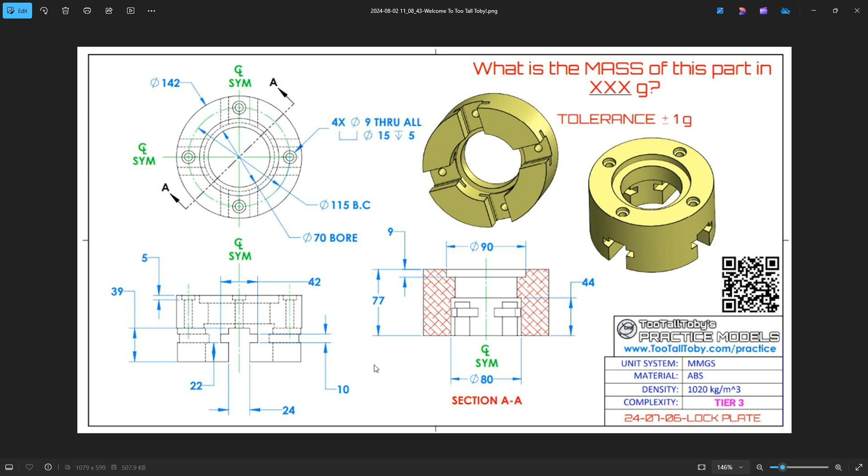So we're going to use IronCAD to build this, and this is all drag and drop models in IronCAD. We don't have to go into any sketch models for this. So let's go ahead and hop over to IronCAD and show you how you can do this.

First thing we're going to do is start with our cylinder. We're going to drag and drop that out, and we are in millimeter units. So we're going to set the value here for our outer diameter, in this case 142. And we know the depth of this is 77, so we'll go ahead and set that as our starting point.

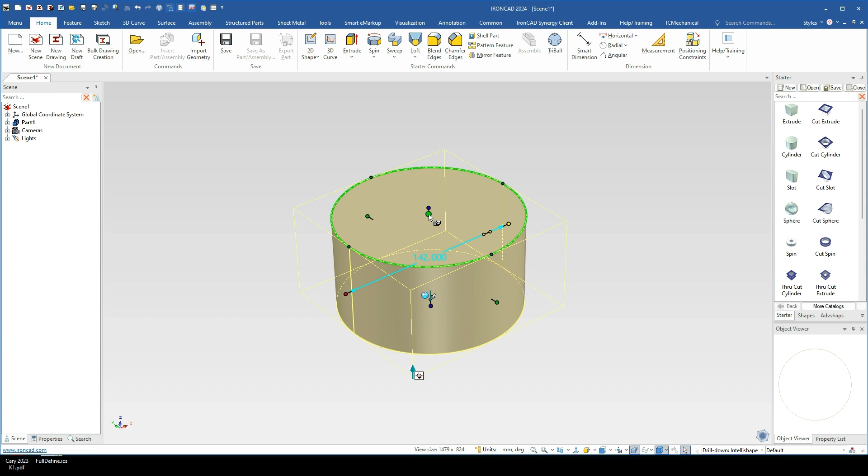Next, I'm going to build it from the bottom up because we're going to put the cutouts on this side, and then we'll put our counterbores on the other. So we'll use this as our starting location, drag and drop another cylinder precisely to the center, and set that diameter for this one, which is going to be 80. It has a depth of 44, so we just hit enter until we get to our depth handle - in this case, 44.

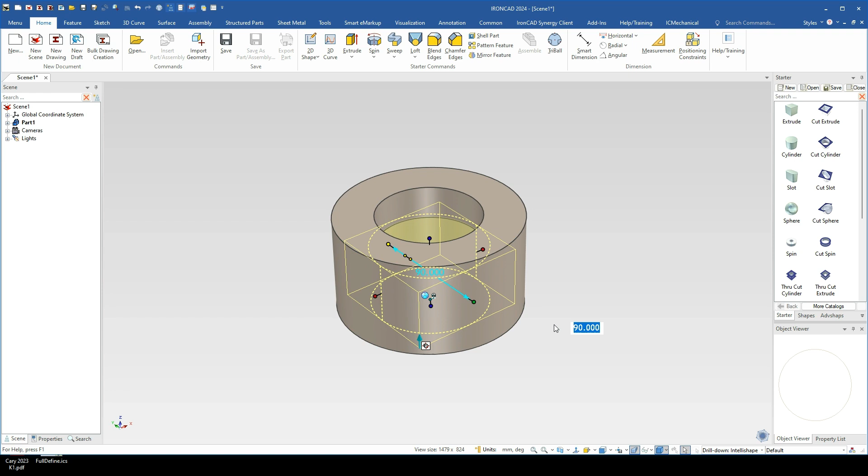Next, we're going to drop another cut cylinder to do the one on the bottom. I'm going to drop it on this edge and hold the shift key down - it'll automatically put us in the center. Again, I just need to set the diameter and the height. If you hit the enter key, you'll see the yellow handle change until you get to the extrusion height, which we're going to set to a value of 9. So that's our bottom one.

Then we'll do the last one the same way. We drag and drop, find that center point or drop on the edge, and it'll snap to the center. We know the diameter on that one is 70 for the bore there. So that's all we have to do to get those three placed, as you can see as we rotate around - very, very easy to start with that process.

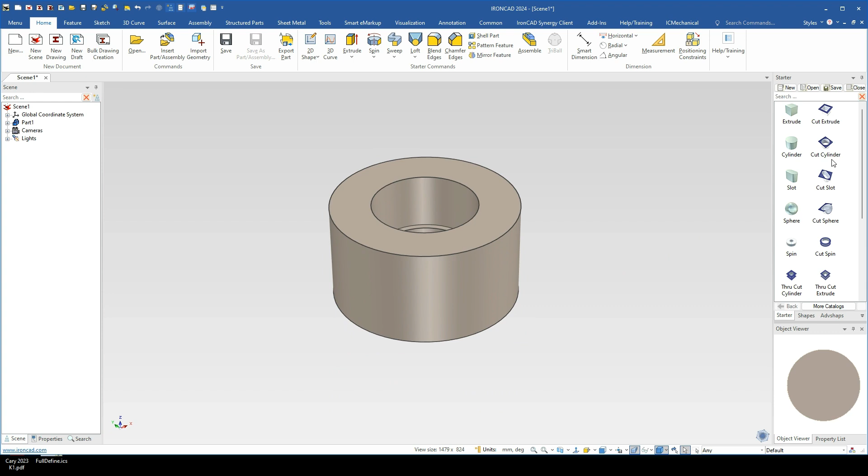Same thing for the extrude. We're going to drag and drop right into the center here because we know the width of this thing. This is the inner one, so we're going to set the width of that one to 24. Then we right click - I did right click on that before I set the value, by the way, so it does it symmetrically. As you can see here, as I drag, it does symmetrically do it, so when you release, it's going to use a symmetrical value.

So anyways, we don't need to set anything here for this one. We're just going to pull it through, and then we'll set the depth on this, which we have an overall depth of 39 for. So that gives us our main shape here.

We can drag and drop another one out here and do the same thing, or we can reuse this shape. In this case, I'll just turn the tri-ball on, and you can simply right click and drag, say copy here, and set the distance as 0, then hit OK, and that puts us another shape right in there. You can see it's kind of floating here in space because we can use this to build our width cutout here.

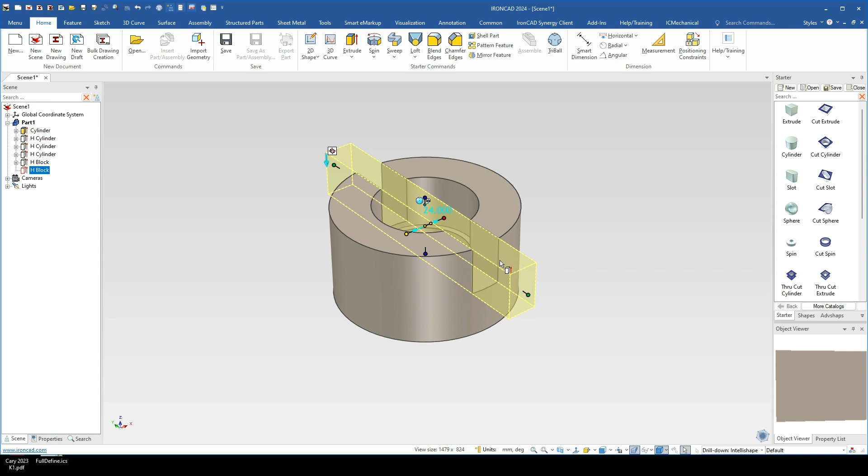What we know is that top part of that cut is 22 from the top. So we'll take that overall value right now and subtract 22 from that, which puts us at the top value. We know the width of that cut, the thickness of that cut, is 10. And we know the width—again, we'll right click and pull this, you'll see that cut appear. The width of that is 42 in this case. So that's all it takes to build that particular shape here.

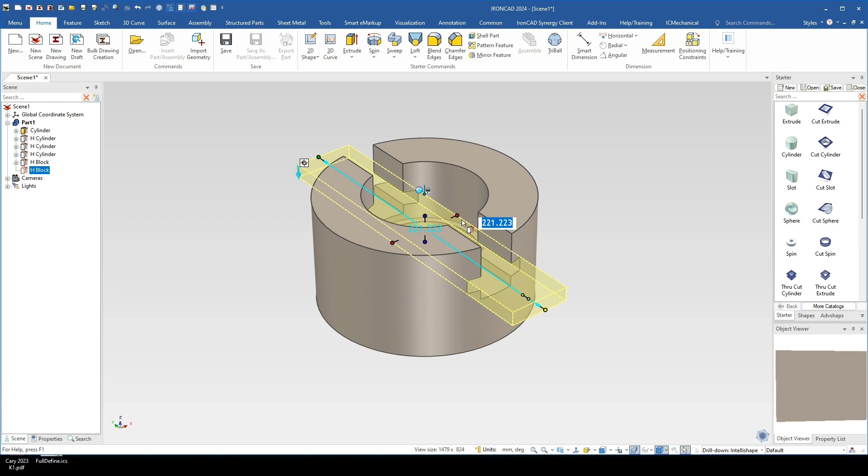So we don't have to do a sketch plane, draw this profile, extrude it in both directions. You can certainly do that if you like, but this is just another way to do it. And you can use both features independently.

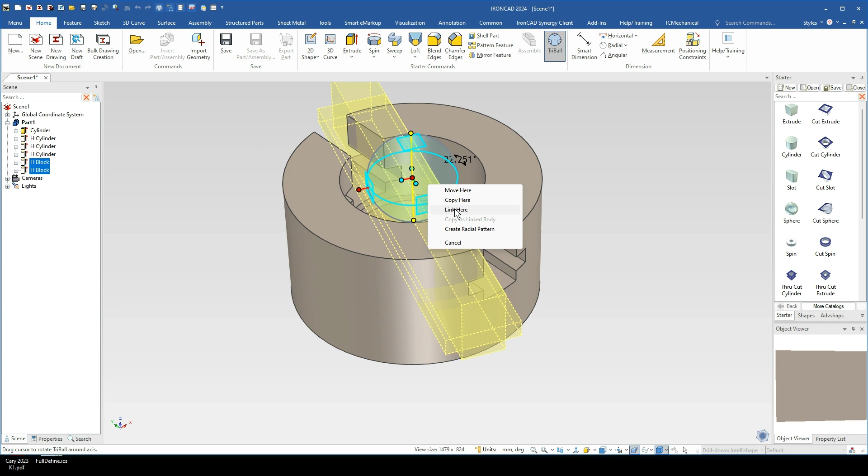Basically you can multi-select them holding the shift key down and use the tri-ball to rotate them, or you can use the pattern feature tool to rotate it as well, but it's simple to use the tri-ball. We can right click and drag, set link here. I'm going to do one more at 90 to create that. So it's a very quick way to do this.

And it's nice that it maintains those features that you can alter these independently without going back into the sketch to do any sketch geometry or references from the center point. It's kind of very handy to use the handles to do that in this case. So that gives us pretty much the main part of our geometry.

So now we'll just come to the other side. And what we need to do is add a counterbore hole on here. So we'll just go to our catalogs. We have a mechanical catalog. You can double click to get in here, or you can drag and drop the whole item out.

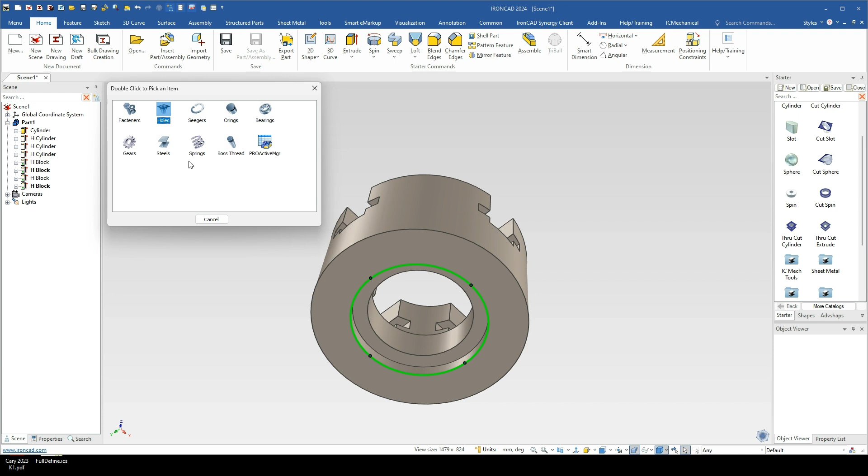I'm just going to put it on this edge here—again, not the point, but on the edge. I'm holding the shift key down. And what that is going to do, once I select I want to add a hole in here by double clicking, it's going to put it right in the middle of our model, just like I did with those other shapes. Same thing works for these tools.

And we're going to do a counterbore. In this case, it's got a diameter of 9, and it's a through hole, and it's got a counterbore diameter of 15 and a depth of 5. So we've already got those set in here, so you can see those three values there and the through hole set, and we can just go ahead and hit apply to do that.

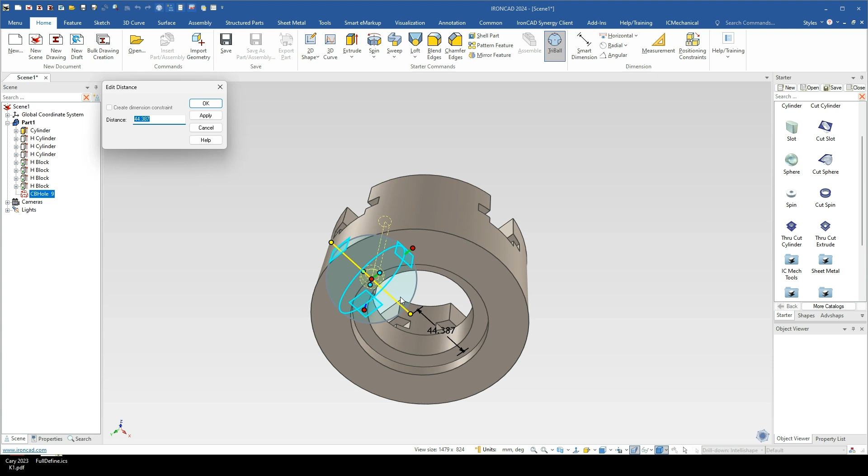Next, I can just move this out, and what we know is this is sitting on a particular diameter which gives us as 115. So just take 115 divided by 2—you don't have to do the math or anything like that, and that'll put us right where we need to be. And then we can just hit our space bar and then hold our shift key down and hit that circular edge to put it right back to the center.

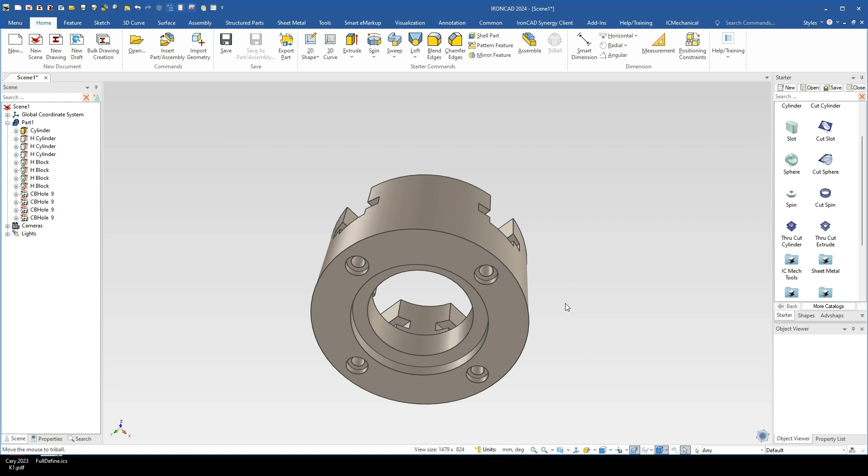Lock our axis of rotation, and we can now create 3 more holes at 90 degrees of those. So again, we could use the pattern tool for that if we liked, but we can use a TriBall to do this as well. So this is kind of how we can build this shape. That's all it really takes to build this. So you've got your counterbores and all your holes inside of there.

That's a fairly simple model to do, very quick to do in IronCAD. And again, if we want to get the properties for this, we can select on that, and we know it has a density of 1020. And if you tab out of there, that should give you a mass of about 710 for that model.

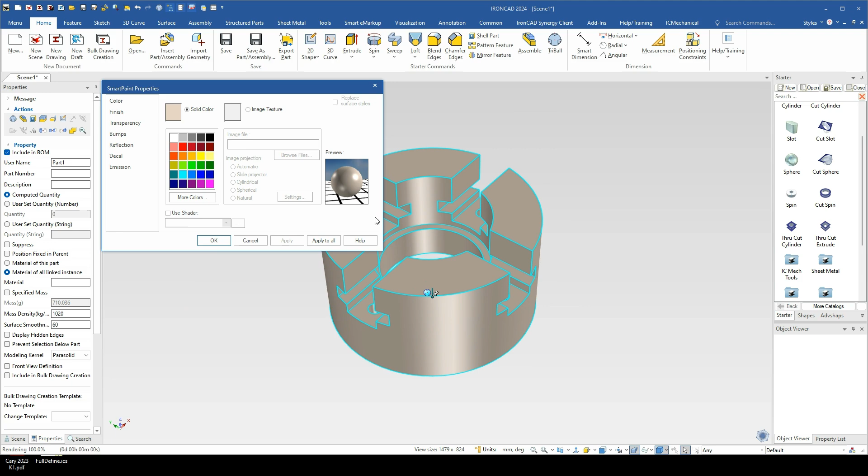So very easy to do in IronCAD, and hopefully you find this useful, how you can think a little bit different in building these models with drag and drop features, and it gives you a little bit more flexibility for modification later as well. Enjoy.